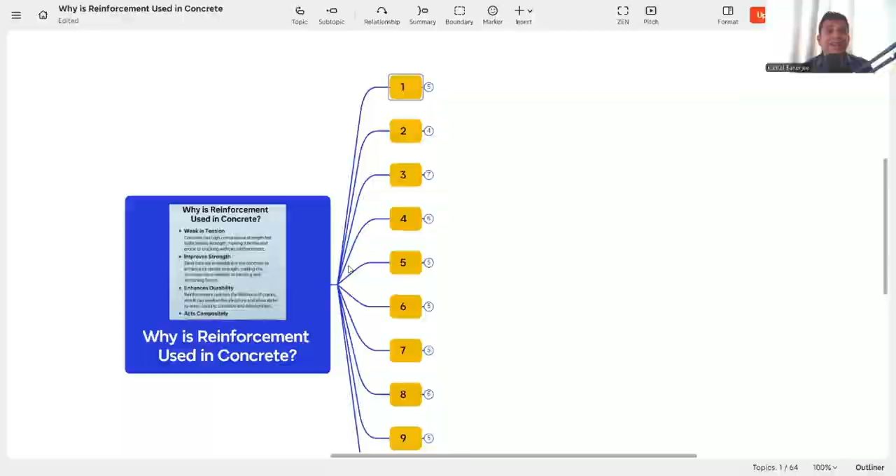So today's topic is, why is reinforcement used in concrete? See, concrete alone cannot take the load or cannot give the structural stability. That is why reinforcement is embedded. But what is the reason behind it? So one by one, let us break it down. The first thing is, concrete is weak in tension.

That means when a structure is subject to external load, tension and compression stresses will generate inside the structure. Now, to give structural stability, the structure needs to withstand both tension and compression. But concrete is a brittle material, excellent in compression, but very poor in tension. So what is the strength we are calculating? That is M25, M30, M40, M45. That is the compressive strength. That means it has a higher compressive strength, but it's very poor in tension.

But not a single structure will be only in compression. There will be tension. So if it cannot withstand the tension, the structural stability will be a problem. So that is why we need to increase the tensile strength carrying property in the concrete, so that it can withstand the load. Its tensile strength is typically just 10 to 15% of its compressive strength. Without reinforcement, concrete would crack and fail under tension or bending.

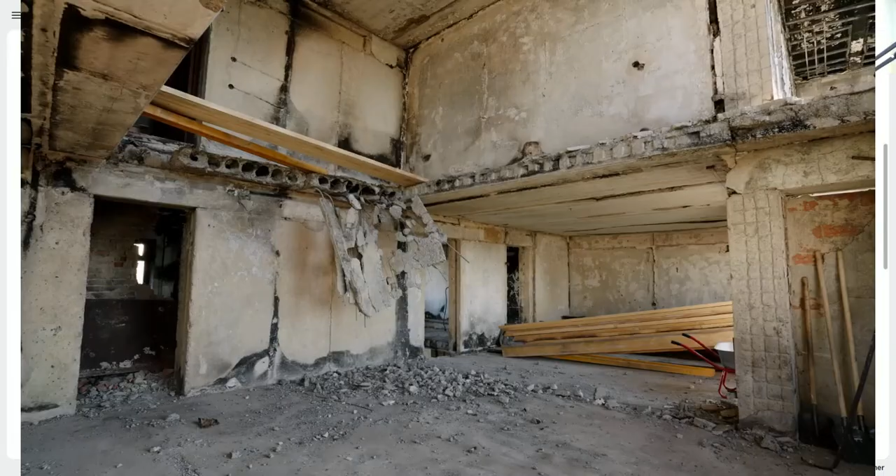So that is why we introduce reinforcement inside the concrete to take the tensile load that is generated in the structure. For example, we can take a simply supported concrete beam. Under load it will develop tension in the bottom fibers. Plain concrete alone would crack and fail. So to resist that in the bottom area, we need to embed the steel, so that the tensile load carrying capacity also increases.

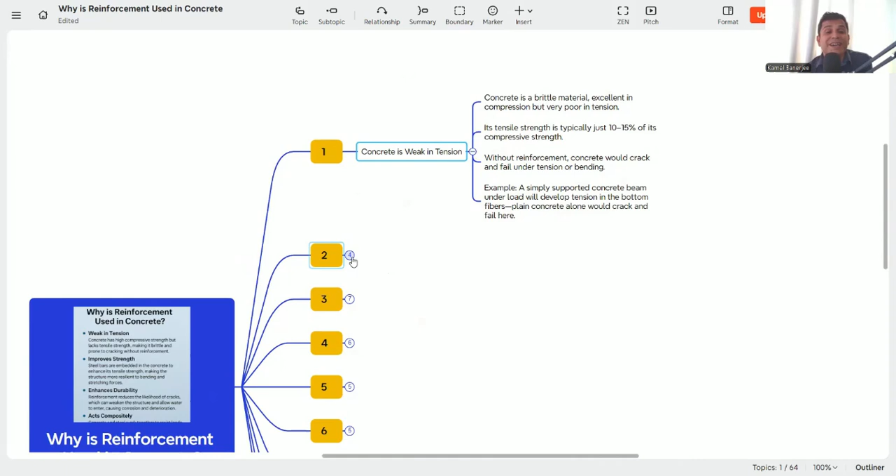So the first point is, concrete is weak in tension, then steel is strong in tension. Steel reinforcement or rebar has very high tensile strength and excellent ductility. When embedded in concrete, it can carry the tensile load that concrete cannot. Steel can also take some compressive and shear loads, improving structural performance. So what is our structure? It has compression, it has tension. So you need to carry both loads.

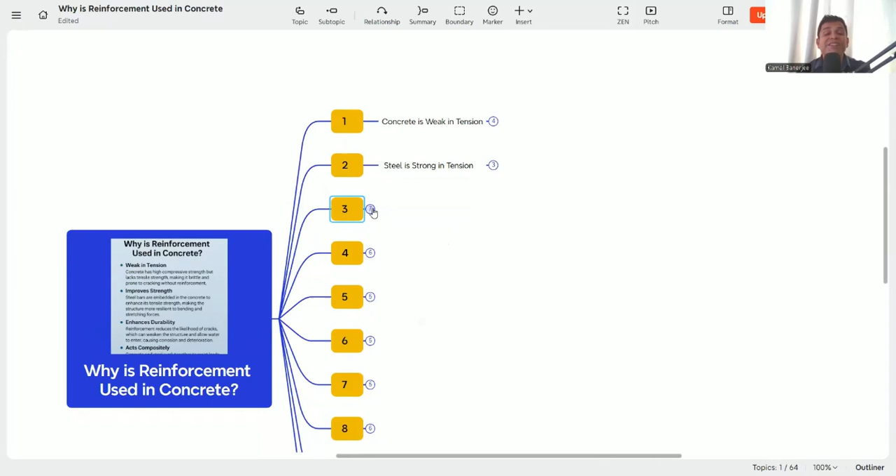So one material, that is concrete, is taking the compressive load, and who will take the tensile load? That is the steel, because it has a very high tensile strength, which is not in the concrete, which has higher compressive strength but lower tensile strength. So in combination of concrete and steel, both the tension and the compressive load are carried, and the structure is stable. So these are the main points, that concrete is weak in tension and steel is strong in tension. So in combination, the RCC or reinforced cement concrete can take compression as well as tension. So composite action, concrete plus steel is equal to RCC. So it becomes a composite material, that is concrete plus steel.

Steel bars are placed strategically inside concrete, usually in the tension zone. And what is the tension zone and what is the compression zone? That means when the load is coming onto the structure, take a simply supported beam, the bottom fiber is in tension and the top fiber is in compression, depending upon the load pattern. So the bottom part becomes the tension zone and the top part becomes the compression zone. So inside the concrete, in the tension zone, you need to embed steel so that it can carry the tension.

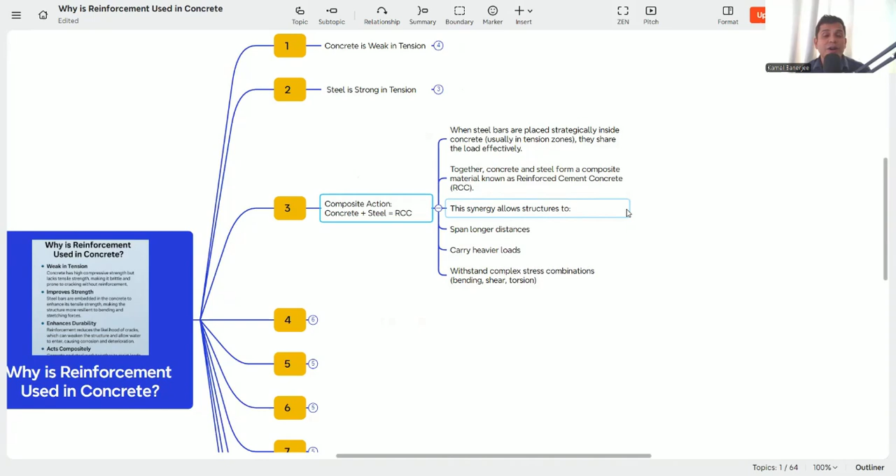Together, concrete and steel form a composite material known as reinforced cement concrete, or RCC, and this synergy allows structures to span longer distances, carry heavier loads, and withstand complex stress combinations, that is bending, shear, torsion, and also compression. So in combination, we are making a composite material, reinforced cement concrete, where the concrete and the steel are there. So tension, compression and shear loads can be carried effectively, and our structure can last longer.

The next part is the strong bond between concrete and steel. Now, we have already found out that concrete is weak in tension, but steel is stronger in tension. So together we can make a composite material, reinforced cement concrete. Now, the steel is a foreign material inside the concrete. The steel needs to bond very properly with the concrete. Otherwise, if the bonding is not proper, then again there will be a problem.

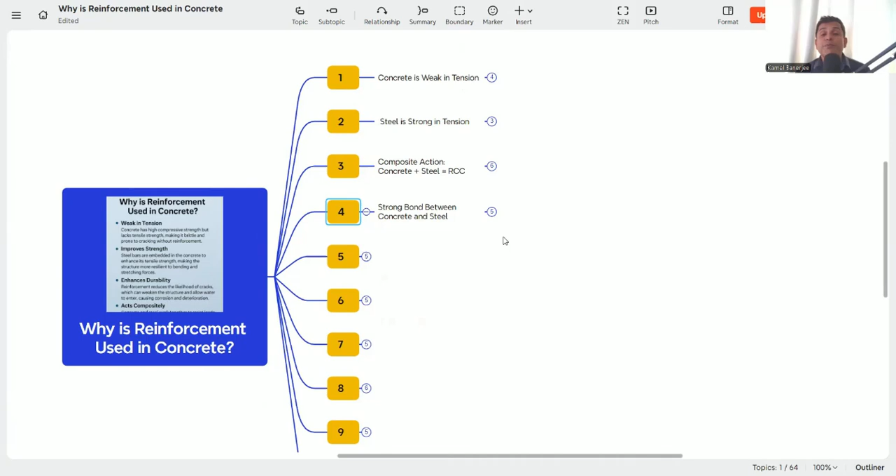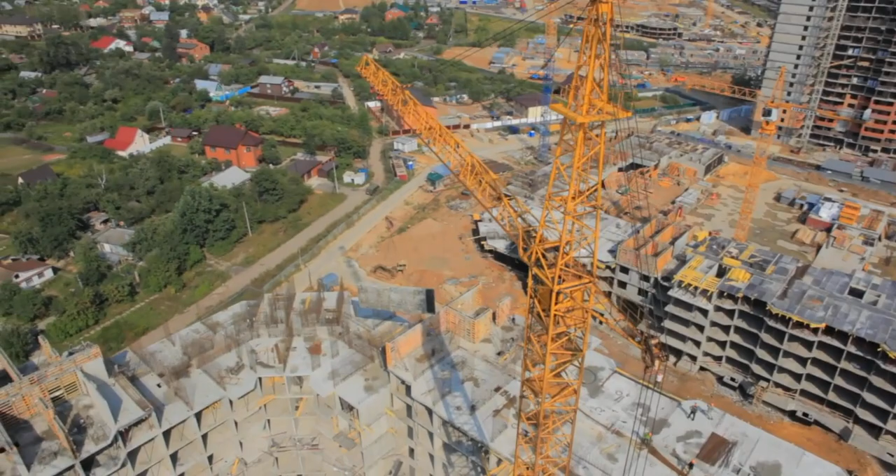The cracks can generate and structural stability will be a problem. So concrete adheres well to steel due to chemical bond and mechanical interlock, especially with rib and twist. So we need to think about how they bond together. If the bonding is not proper, then they will not act as a composite material. Then what is our purpose? That purpose will not be solved.

That is why it's chemical bond and mechanical interlock. Similar thermal expansion coefficient prevents internal stresses due to temperature changes. Now this is very important. That is why steel is used in concrete and not other metals. Why? Both concrete and steel have similar thermal expansion properties. So due to temperature changes, they will expand or contract in a similar way. So internal stresses will not generate due to temperature changes, and internal cracks or internal failure will not happen.

Both materials expand and contract similarly with temperature, 12 × 10^-6 per °C. That is the thermal coefficient of steel and concrete. It's very similar. If it is not similar, what will happen? The concrete and the other metal will expand and contract differentially. And if there is differential contraction or expansion, then cracks will generate, because both are not acting similarly. Then internal stress will generate, there will be cracks in the concrete, and our structural stability will be a problem. So it has very good bonding and similar thermal expansion property. Otherwise, we cannot even use it inside the concrete.

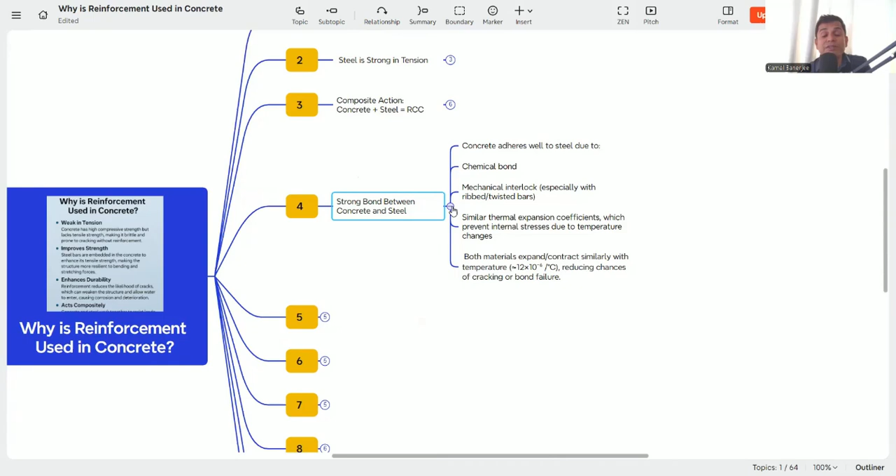The next part is durability and protection of steel. See, this is a very important part: steel is nothing but iron, and it has a tendency to rust when it comes in contact with moisture and oxygen. So inside the concrete, if any moisture is ingressing, it can rust, the tensile property can be deteriorated, and also due to the volume changes, it can crack the concrete.

So when embedded in concrete, steel is protected from corrosion due to the alkaline nature of concrete. Concrete pH is 12.5. That's highly alkaline. So when steel is embedded inside the concrete, this highly alkaline property makes a film around the steel, which protects the steel from corrosion. So this also helps make a composite material. Concrete cover shields reinforcement from moisture and aggressive agents. Adequate cover and mix design improve the service life of the RCC structure; that is a separate part. But the protection of the steel also comes from the concrete's high pH. If the pH is low, this protective film will not be there and the steel will corrode. And if it corrodes, our concrete structure will not have structural stability.

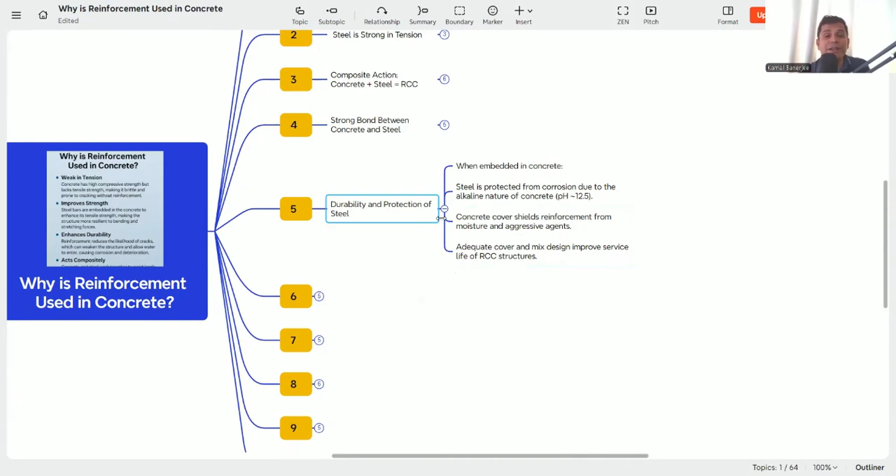The next part is control of cracks. If there is only cement concrete, it is prone to crack due to tensile force, so reinforcement controls and limits the cracks, keeps cracks within permissible widths, and maintains aesthetics and structural safety. The internal stress that generates will also be taken care of by the reinforcement, so that cracks will not generate. That is also why we need to embed the reinforcement bar.

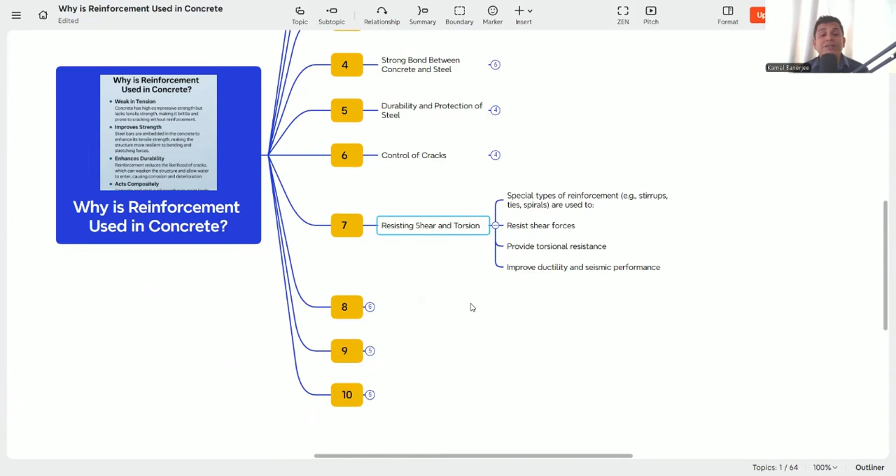The next is resisting shear and torsion. See, in the structure, there is not only tension force and compression force, but there is shear force and also torsion. That also we need to take care of. Otherwise, our structure will not be stable. So, special types of reinforcement: stirrups, ties, spirals. Why are we using them? To resist shear forces, provide torsional resistance, impart ductility, and seismic performance. Not only the main rebar, but the stirrups we are using also help us to resist shear force, torsion, and seismic load. So that is why it also helps in resisting shear and torsion.

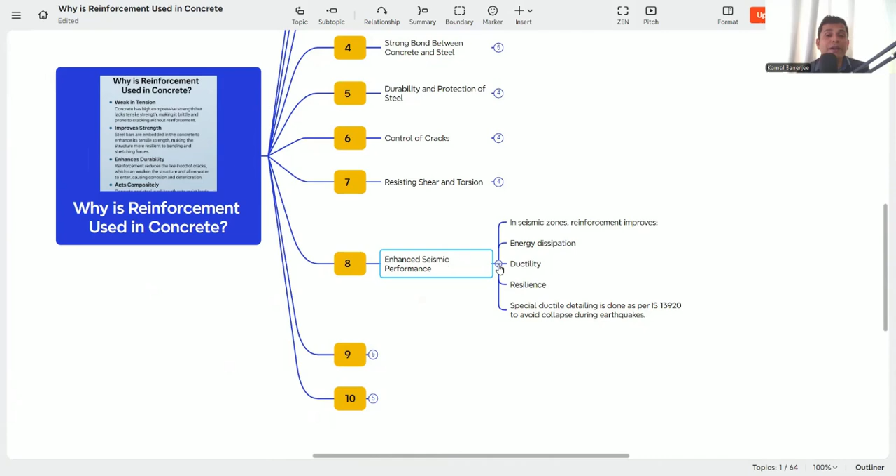Then enhanced seismic performance. In seismic zones, reinforcement improves energy dissipation, ductility, and resilience. Special ductile detailing is done as per IS 13920 to avoid collapse during earthquakes. So earthquakes have become a problem. If we are not thinking about earthquake resistance, our structure can be unstable during an earthquake. So that is why we need to introduce steel, and the steel helps us fight against the earthquake. So it enhances seismic performance as well.

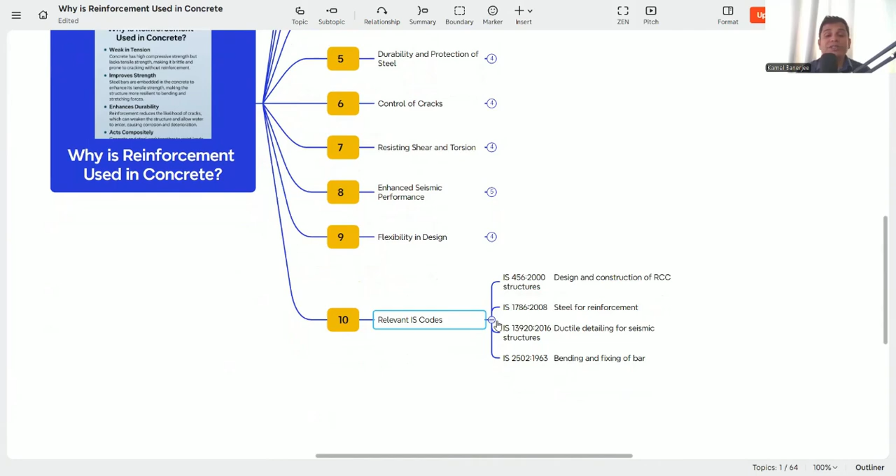The next is flexibility in design. Why? With reinforcement, engineers can build long span bridges, high-rise buildings, and complex shapes. Without the steel, the span will not be that much. It also optimizes material use and achieves better economy, functionality, and aesthetics. That also helps our structure last longer. And the relevant IS codes: IS 456, design and construction of RCC structures; IS 1786:2008, steel for reinforcement; IS 13920, ductile detailing of seismic structures; IS 2502, bending and fixing of rebar. So this is all about why reinforcement is used in concrete and not other materials.